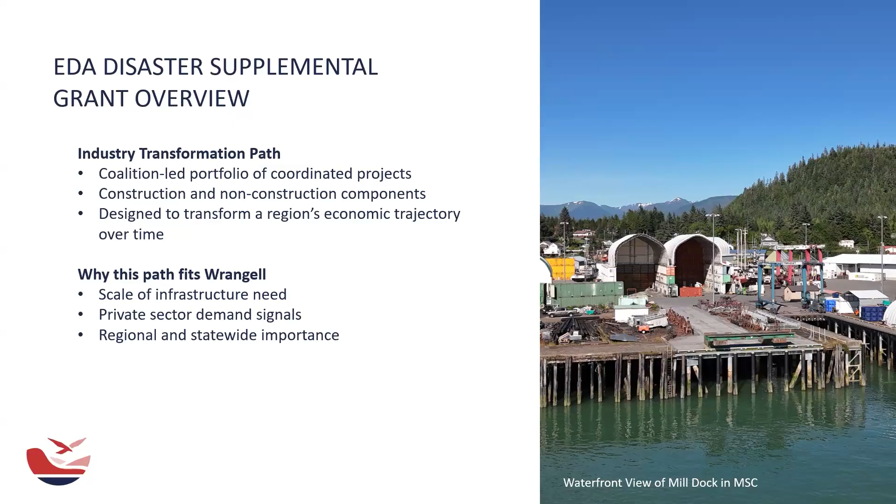So the other thing I think on this side, the most important piece is the coalition-led portfolio. And really, the analogy I use is it's not like the community and all of us are going to the grocery store and deciding what we're going to make for dinner. We generally have a good idea what we're making for dinner, but we want to refine it. So we're picking up the ingredients for the entree, so to speak, right?

So we have three different components, and we want to use this coalition to refine each of these components to make the biggest compelling pitch we can to EDA to secure the funds. So that's how I would describe it, is getting community comment and feedback. This isn't something that this is it, we're rolling with it, and thank you very much, and we're gonna just speak at you. It's a very collaborative effort with the coalition, and we spent thousands of hours collectively with each of these stakeholder groups, and now we'll do a lot of robust public engagement in the coming weeks.

And actually, during the open house ceremonies of the new water treatment plant is where I first learned about the EDA grant. And I think it was Shirley. Yes. Her first name or last name. Anyway, she said it looks like it was almost written for Wrangell because of all the projects we already had in the hopper. That's a good point, Patty.

A lot of the projects that are on our list, or all three of them really, have been identified through long-standing capital improvement priority lists, either at the state and federal level. And so, again, these projects weren't manifested out of nothing. It's not a shot in the dark.

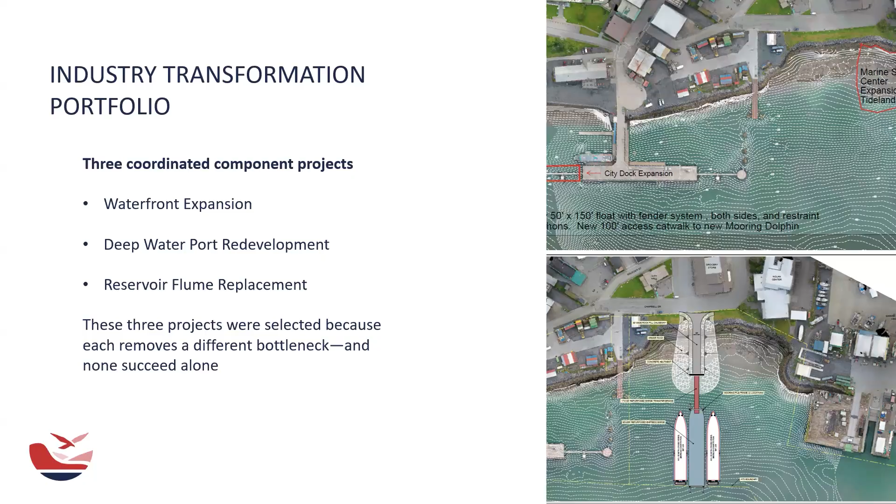Amber, I'm going to cue you up here to talk a little bit more in detail about the waterfront, if you'd like to add a few things here for the public.

Yeah, thank you, Kate. Can you hear me? Yes, I can. Excellent. Thanks for allowing me to walk folks through a little bit more detail of the 3 projects that we have.

So with the slide that I see on my screen, it's what we're calling the Downtown Port Expansion Project. It's one of the 3 component projects that we'll submit to EDA. What you see here is an expansion to City Dock as one of the 2 components of this project.

This project will include removing a mooring dolphin and a breasting dolphin on the north end of City Dock, as well as the existing catwalk that you see in that square. That area will be cleared to allow for a new float to be installed, and beyond that, a new catwalk and a mooring dolphin on the north end of that new float.

The purpose of this is to allow those European style ships that are coming into Wrangell — I don't work with them in full detail, but I understand many aren't able to connect their disembarkment location to our city dock during differential tidal changes, just based on elevation and coordination between the vessel and the city dock.

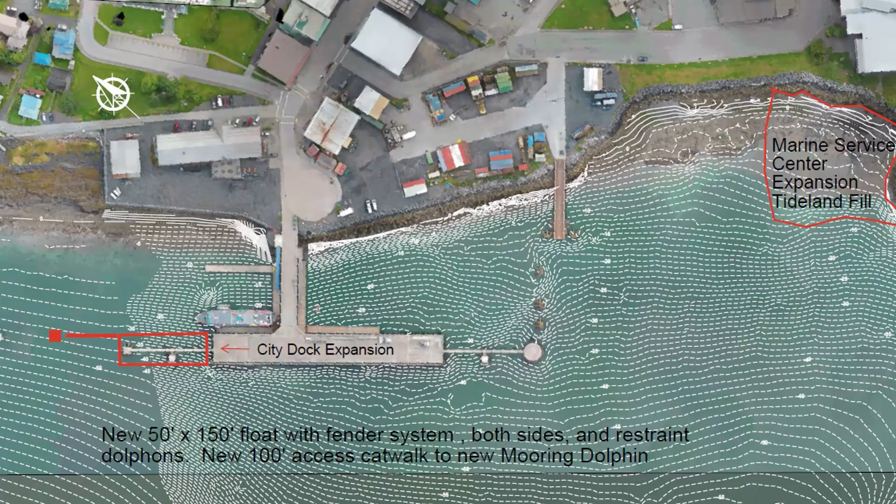I think what we're trying to achieve in this iteration of the waterfront master plan is a balanced waterfront, everything from commercial to industrial activity. The Port of Everett does a good job achieving that balanced waterfront concept. Originally the waterfront master plan was really a park, and a park doesn't pay the bills for the community. So we're trying to find that balance of driving economic development while also creating space for the community to enjoy.

This visual provides an overview of what may appear to be the site occupancy. There's been an updated drawing since this presentation was put together, but generally this gives you the overall layout. Amber, go forward with the explanation here.

As Kate said, this is our preliminary outline for what we think this site could look like, based on continued discussions with future occupants at this site. In the upper left-hand corner of the site, you'll see it says generator and data center. This has been revised a bit now with additional conversations with GreenSparc and their data center ideas.

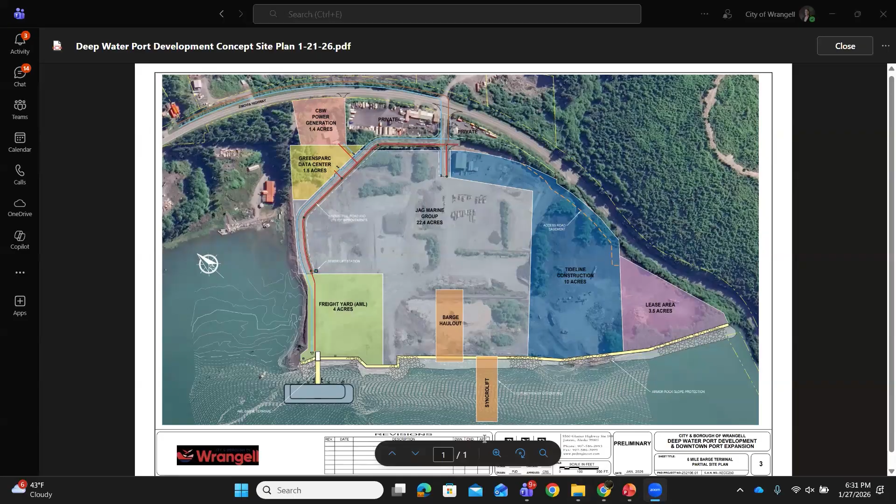From a power perspective, I could speak for an hour on how it's a beneficial thing for the community of Wrangell, and we could see ratepayer decreases out of the increased volume in sales to them. But I'll reserve that for a different time, perhaps the town hall. Just a bit of light - I think that the scale that people are looking at in the news for 500 megawatt data centers compared to a 2 megawatt is very, very different. I'm happy to have conversations with folks to explain how.

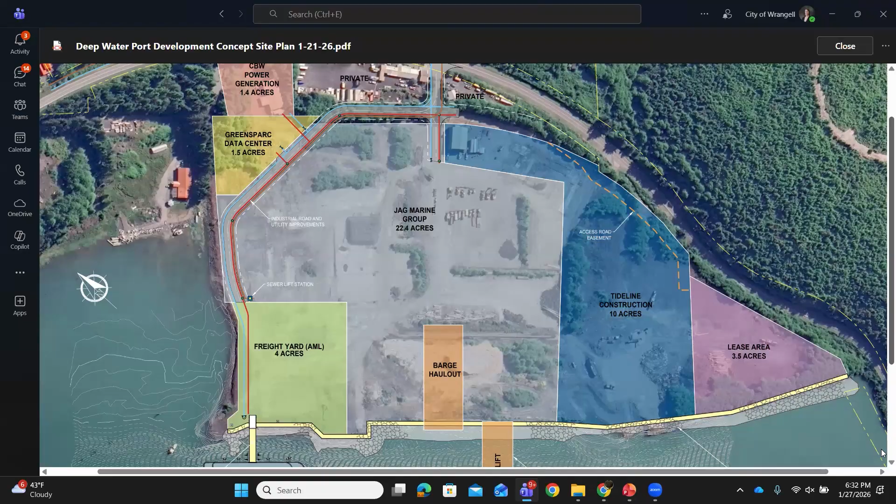Mason just described that power generation side at the top. With further development, we've got a separate parcel for GreenSparc, and then again just some revised yard space for AML, allowing a little bit more interior space for the JAG shipyard. You will see here there's a barge haul out that they've put in, and a Syncrolift down on the JAG waterfront face. That again would not be a part of our project. We're just showing some various components that our project will support, as well as the AML barge terminal that you see on the water northwest side.

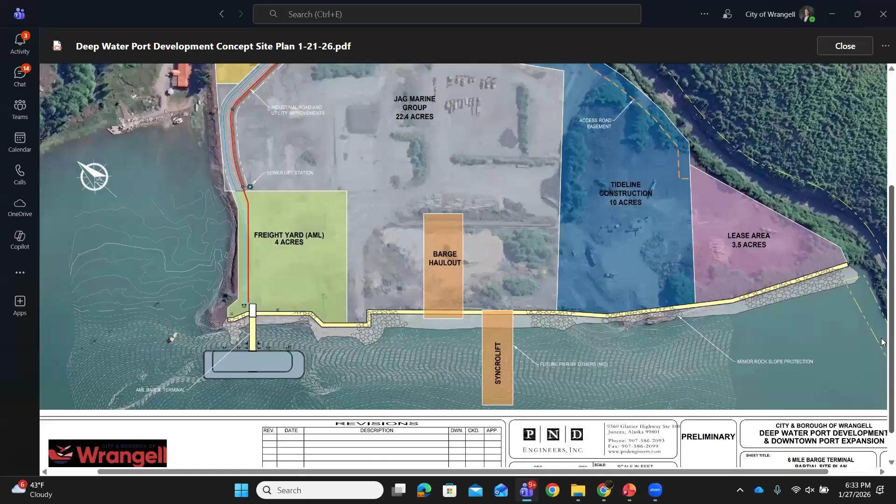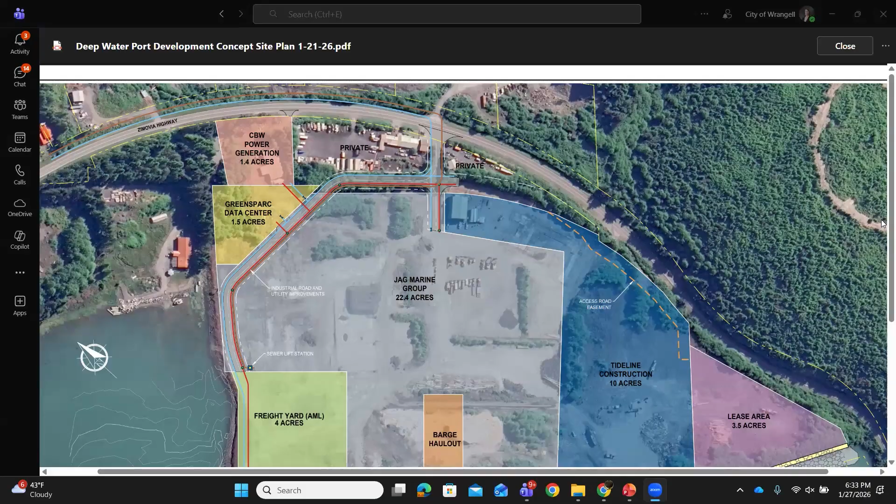But in essence, this project is again subdivision development, which will include all the necessary subdivision and platting, a survey of course to go along with that, and then really just construction of the roads and all of the utilities necessary to support those operations, which we have reviewed with each of those occupants.

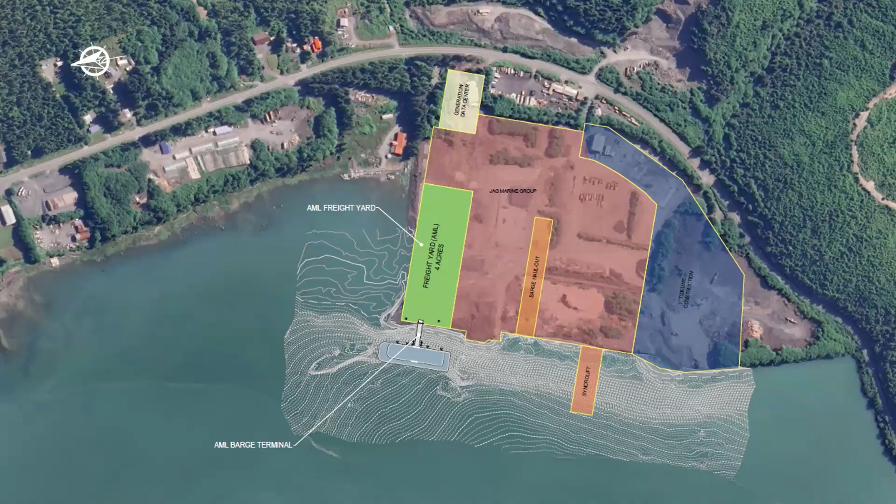It will include, because our water and sewer terminates at the last home on the uphill side, just at their more northern side of their house, extending water and sewer services from there along the highway and doing some directional drilling to get to our site. We're focused now on having the primary entrance into the site through the 30-foot easement that we have currently.

Moving around - it's kind of hard to describe there. Can you pull that other? There you go. So you can see that development there with the utilities coming through. Kate's got her cursor on it, and allowing for 60-foot right of way for AML traffic and JAG equipment coming and going through the site.

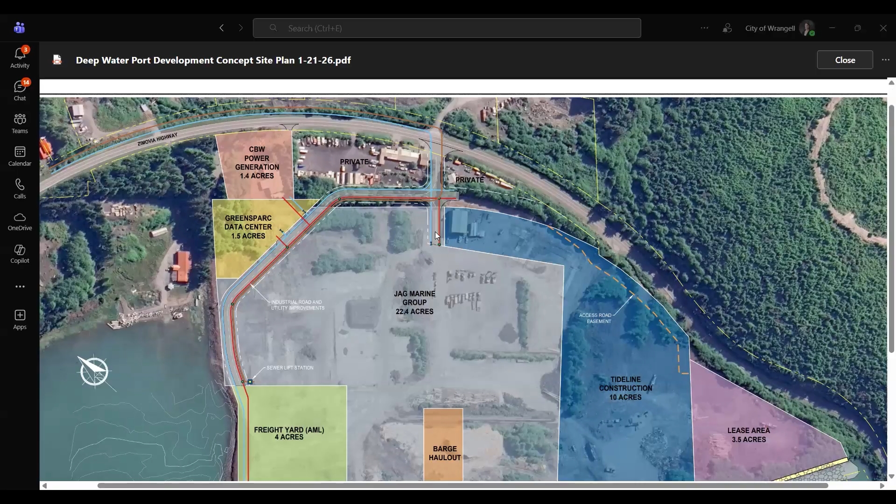Beyond that, if you'll scroll down, Kate, to the waterfront, this project also will include removing the bulkhead car rails that are used as bulkhead protection across the entire site of that waterfront face. There is an opportunity, if the JAG deal goes through, that we could eliminate a portion of that because JAG will be doing something different with their waterfront face. But until that is a done deal, we want to make sure that we have at least the minimal improvements that we could get from this EDA funding to improve that waterfront face, which would include removing the existing bulkhead and then basically developing an armor rock slope that provides protection, erosion protection against wave action and surge. That is the project there.

I don't know if anybody has any questions. Does anybody have any questions on that one? Okay, I think we're all good to move forward.

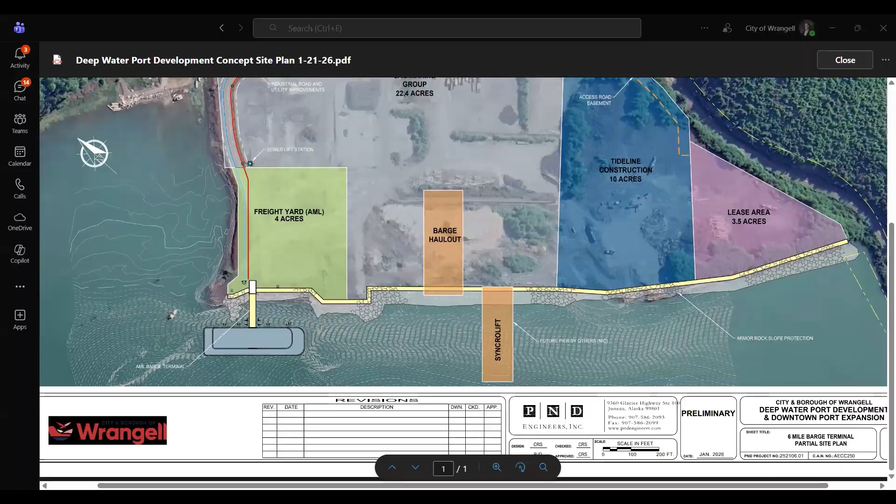Well, you might speak to that one, Kate. That was the AML design for their - so it just gives a bit more detailed overview of the bathymetry, so kind of the ocean floor and what the elevations look like in that area, and then what would be the marine infrastructure for Alaska Marine Line.

So in my introduction, I talked about the layers to this effort here. You've got the project portfolio that the borough is seeking funds for, which is all the utility infrastructure and site preparedness for the private sector industry to come in and then build what it is that they want. EDA really evaluates project success and funding on what does your investment equate to in private dollars. So if we extend our water and sewer, if we build out the subdivision, that equates to X dollar investment from Alaska Marine Lines or JAG Marine Group.

So I think it's really important to stress that these partnerships are critical and they are evolving, and there are elements of design that have not yet been drawn out in full concept yet that will really be the obligation of the private sector industry to realize, and they will have to review and consult with the borough and ensure that we have an opportunity to weigh in on just placement and location and general scope.

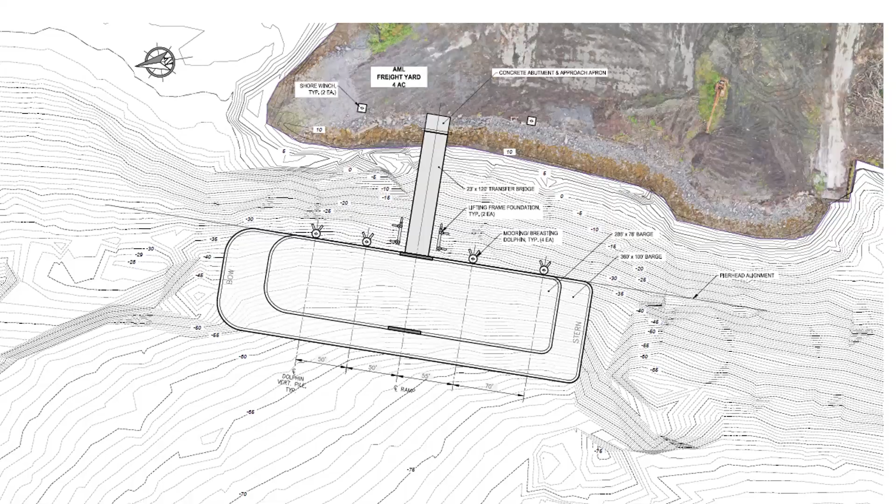Moving on to our final and third project component, which may not be the sexiest thing in the world, but water is the spice and core of all our existence. We cannot do anything without water. And this, believe it or not, folks, is part of our existing water infrastructure. So I'm going to kick it over to you, Amber. And Tom is here in the audience, if you'd like to comment on the project as well.

Yeah, a lot of thanks... spice in these projects, hey, I'm just going with it. Tom, feel free to jump in if you want to add anything, but this project we're calling our flume replacement. It is replacing approximately 250 feet of the existing flume, which is primarily this open culvert that you see here. Originally, I think there was some wood stave included as part of the open top, but I'm not sure if any of that's left. Tom could comment on that, but in essence, we've got...

Kate, do you have the other photo of the failed crib? Okay, I don't have it on this slide, but I can pull it up somewhere, just to give folks an idea of what we're dealing with. This culvert was built on wood cribbing. A lot of that cribbing is deteriorated and fallen, causing the culverts to become disjointed. And of course, we're now not able to capture all the water that we need. It's projected that we're losing about 15% of the water that we could be collecting into the upper reservoir based on the deficiencies here. So it's been a project that's been on our list for many years.

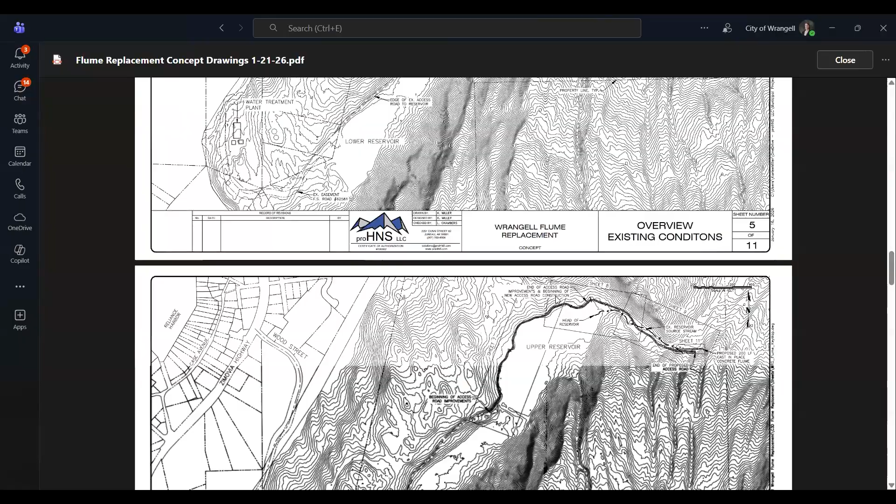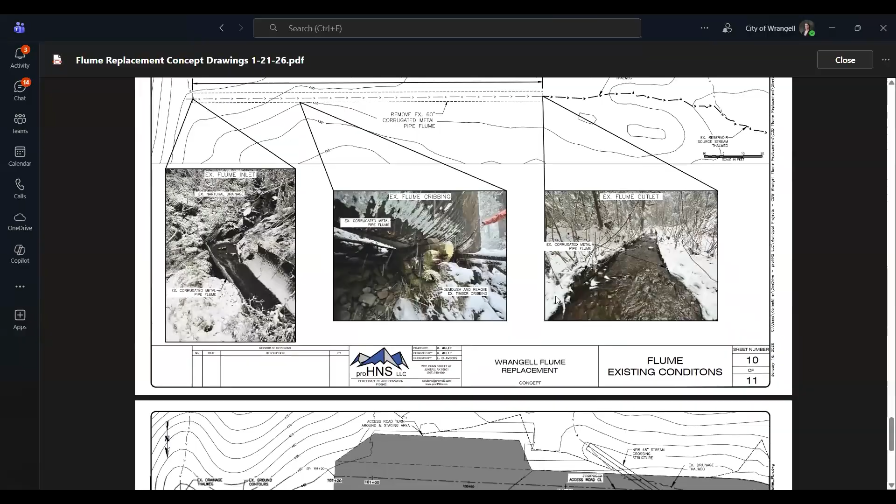Well, they're figuring that out, but very simply put, this is redirecting water off our watershed that would not otherwise hit the upper reservoir. And 15% seems a little light to me—I bet it's a lot more than that. I know Tom and I have taken several hikes up to the flume, and really, it's this makeshift instrument that the guys from back in the '60s put together, and it's not effectively capturing water. Water being a scarce resource to the community, especially integral to industrial users such as Trident Seafoods and fish processors, would certainly be integral to some of the mill property stakeholders if those expansions move forward.

So this is an easy one, and I think it closely ties to all the economic development that's underlying. Some people are like, 'What the hell's a flume?' So it's nice to put it in simple terms.

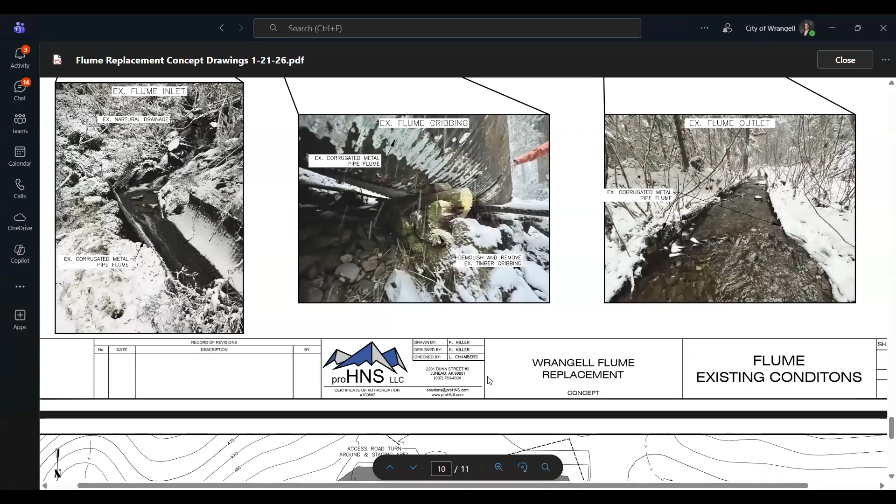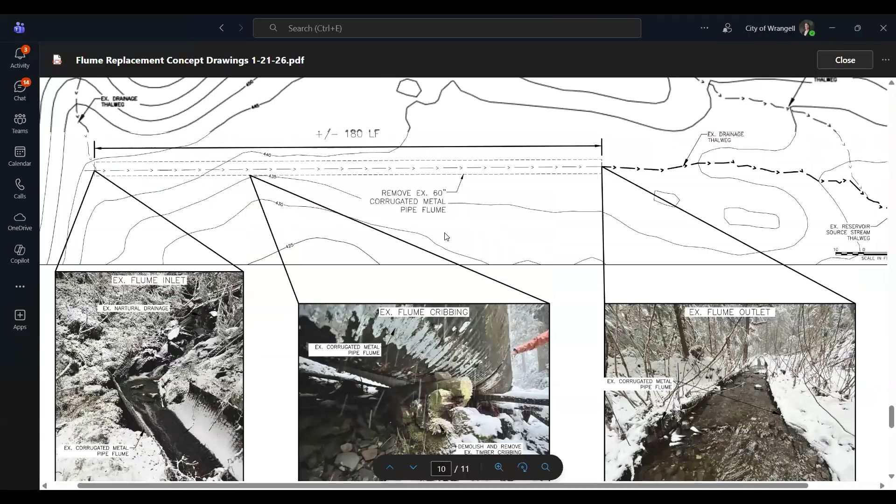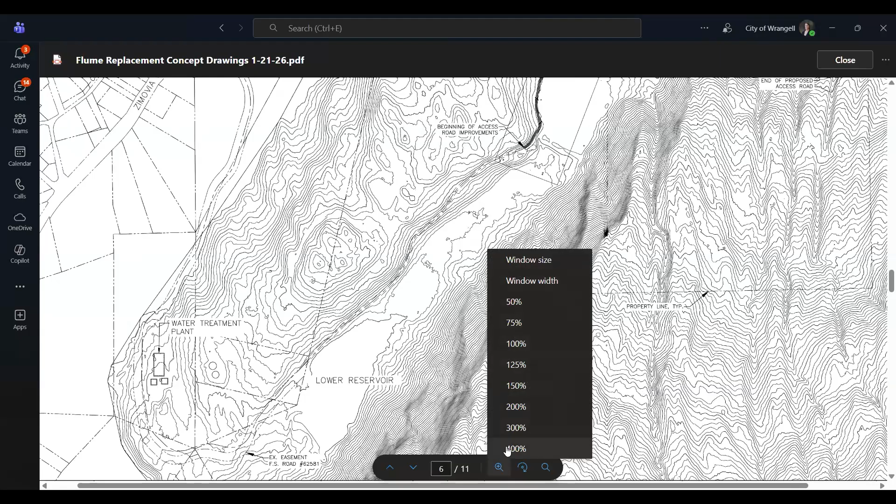Great, I see you got those drawings. If you'll go to page... it's the drawing in the center of the screen right now. Page 6 will show the road. You get a sense of where the project starts, at the entrance of the upper reservoir, and then routes around the backside. Yeah, there you go, scroll up a little bit more. There you go.

So the road starts on the left-hand side, heads up around the upper reservoir, and then you can see the section to the furthest right of that drawing contains that 180-foot flume.

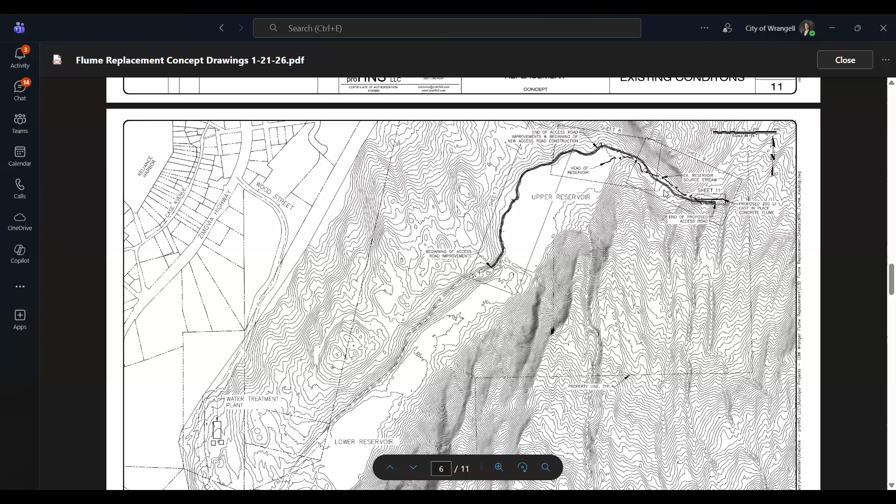For a little bit more detail on what we're looking at for an improved flume, go to page, I think it's 3 above that. Yeah, 3, a couple pages above. Top right, right-hand side at the top.

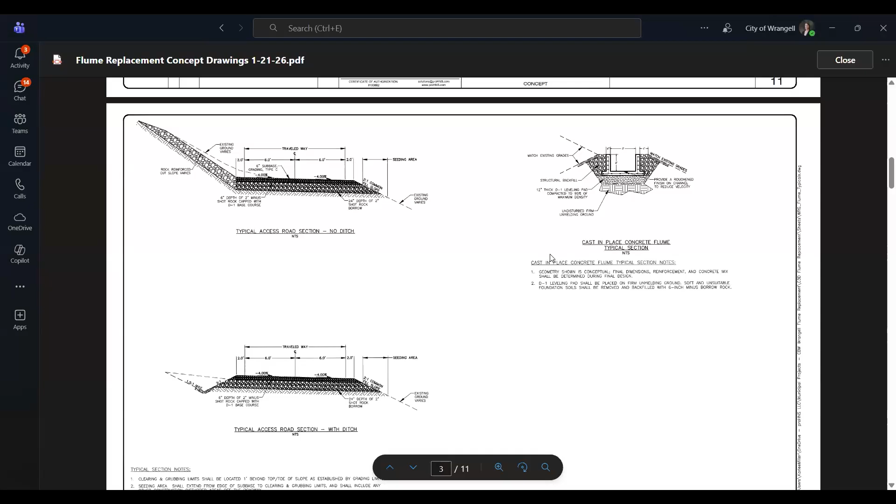So we're looking at about a 3-foot wide by 2-foot high concrete flume. It would be supported as necessary with a leveling pad and 180 feet of that. The very last page, if you scroll down to the very last page of this set of drawings, you'll see that 180 feet and what the elevation of that flume structure would look like.

So there's a lot of work in the road. Tom and I met with the engineers last week and reviewed some potential changes to bring the scope of the work down. We think it can be a pioneered road, save for what may be needed for getting a concrete truck around there. But we're also looking at the potential of hand mixing the concrete up there if there's some cost savings that could be realized in some value engineering. So we're looking at that. We'll further develop that project and have it ready to go with our preliminary engineering report and the associated budget with that final concept.

Hey Amber, Tom's got some things to add on this one. Sure, great. Yeah, thanks Amber, that was a great review. I just wanted to add in a few extra things here.

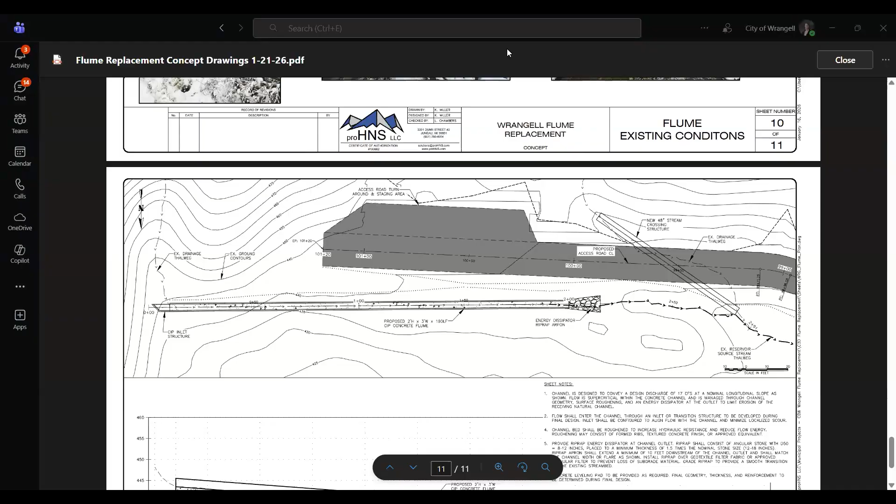We have a lot of work to do with regards to our water infrastructure. We spent $24 million last year on our new water treatment plant. We still have a lot of dam work to do, and water mains and things like that. The flume is one that has been on our project list for a while here. And this will capture additional water to increase our resiliency, especially in the summertime, and supporting our local industries and things like that.

And after a couple of meetings here this week, Amber and I were able to knock almost a third of the project cost down after meeting with the engineers. If anybody was paying attention to the fine detail on some of those drawings, things were a little bit overbuilt initially that we're trying to scale back with what will be useful for us long term.

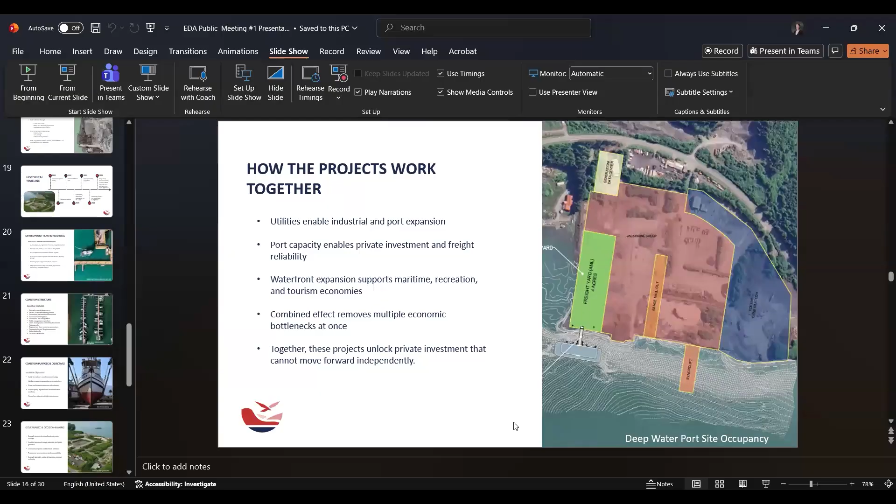Historically, we drive a 4-wheeler as far back there as we can get in the summertime, and then we have to pack tools, materials, and supplies by hand to get back there. So it's a very difficult thing for us to maintain as is.

And the last thing I'd say is ultimately our goal here is to get a long lasting solution. Timber frame, wood crib, things like that, in the back 40, no sunlight, wet all the time, it's going to last 15 years or so. We're looking to get a concrete solution that's hopefully going to last double or triple that. So that's what we're going for. Thanks, Tom.

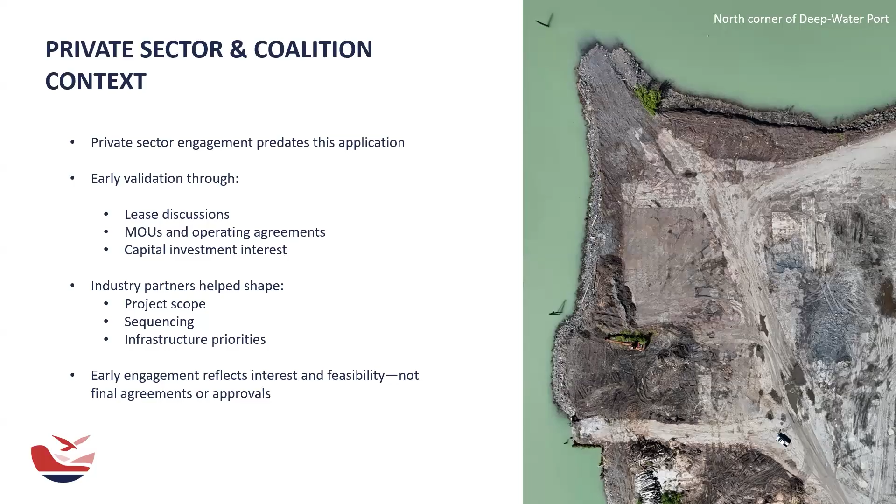Obviously, project scope, sequencing, and priorities have been informed by industry partners and bringing those details to the community through the sequence of public engagement. But nothing is final, nor are we seeking approvals at this time. Prior to grant submittal, we will review this with the assembly and seek authorization for that package and funding to support the match. That'll be on February 24th, and the grant is due March 3rd.

I think I've pretty much tackled that piece. I did want to highlight the coalition structure. Mason touched on it earlier. So we have internal departments, private sector. We also have Wrangell Public Schools present. AVTEC, new director Corey Ortiz came online and he jumped on the call. The commissioner of the Department of Labor to help expand workforce development opportunities. We also have members from our community action group. And I had a great meeting with the chamber director last week. So weaving more and more partners into the mix.